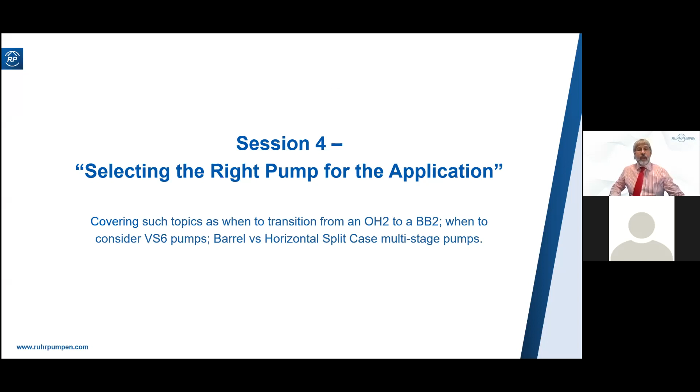Now let me get back onto the show. And here we go.

Okay, let's look at a couple of scenarios. Scenario A, you are a process engineer or mechanical rotating equipment engineer, and you have the preliminary process data for a pump duty. For example, here we go, 200 cubic meters an hour, 200 meters head, 5 meters NPSH, specific gravity of 0.7, temperature 150 C, and 50 cycle

site electricity. My apologies that I haven't changed this into American units for this Western Hemisphere presentation. You'll get used to using cubic meters per hour. Anyway, here's your duty. So the question you ask is, what sort of pump will this be?

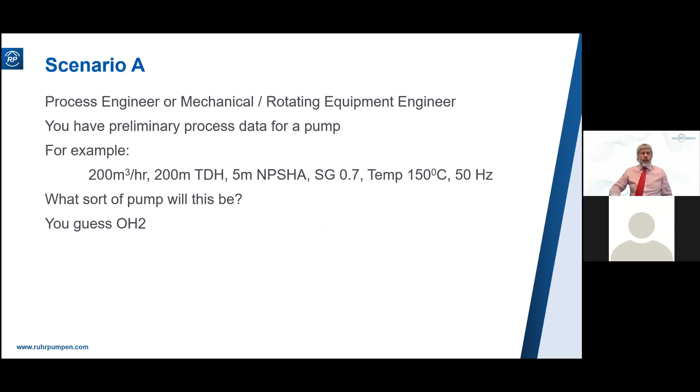Now, this is presumably an early FEED study stage, and you probably don't want to waste the pump vendor's time by asking. So you go with your gut and you say, it's probably an OH2. Are you right? Well, I'm going to give you the tools to be able to check this out and save you getting into trouble.

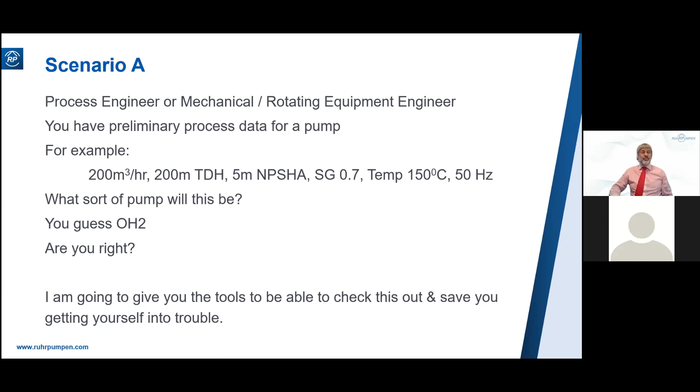That's scenario A. Scenario B, well, it's the same situation, but from the opposite viewpoint. This time you're a salesman or applications engineer, and your customer, the aforesaid process engineer in scenario A, has asked you, what sort of pump do I need for this duty? Just a quick check, don't spend long on it. So what do you do? You probably plug it into your pump selection program and see what it spits out.

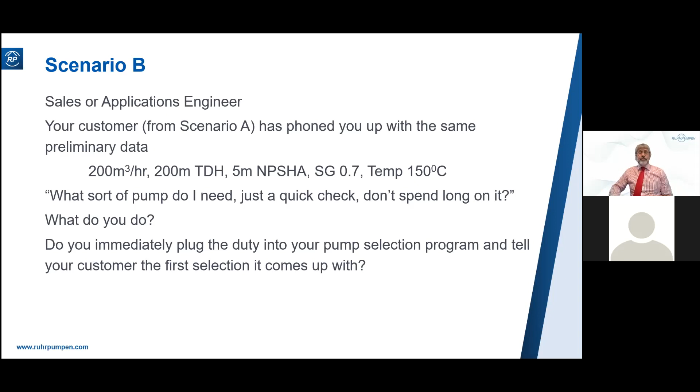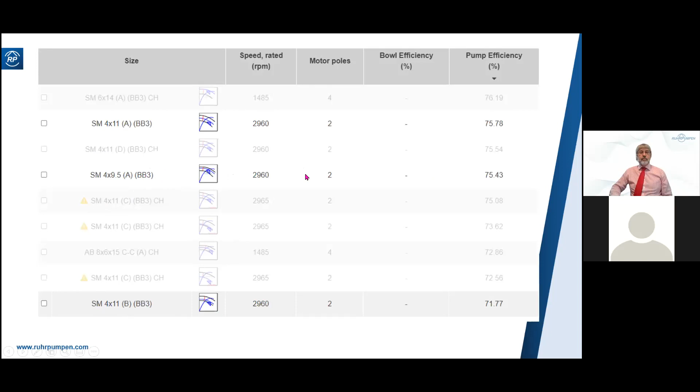Well, I did that. The program defaults to listing possible selections by efficiency, the most efficient ones first. So the first 3 compliant selections, 1, 2, 3, are BB3 pumps, actually split case multi-stage pumps. Next, we have a couple of BB2 pumps, well back on their curves, as you can see. Then we get a BB2 two-stage pump. And finally, in 7th and 8th position, we get to an OH2, which is what we were expecting it to be in the first instance.

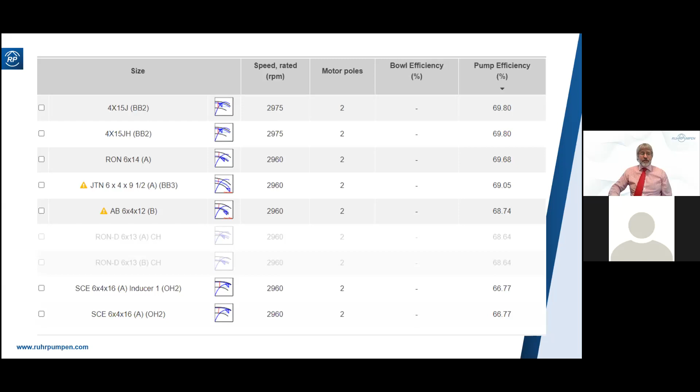Well, what did you do as the applications or sales engineer there? Did you tell your customer, it's a 3-stage BB3. It's a nice selection, bang on best efficiency point, and it's 76% efficient. Well, I hope you didn't, because it blatantly isn't a BB3 selection. So what do we learn from this? We learn that pump selection programs are stupid. They're a great tool, but a poor master. And finally, always know the pump you expect to see before you use the pump selection program.

And that's what I'm going to help you to do, to give you the tools to be able to check out before you go in and plug this into a selection program. You know what you're going to be looking for, what to expect. And here is what you do. You start with the least expensive option, the OH2. When you think about it, 200 cubic meters an hour and 200 meters, it feels like an OH2, doesn't it? And anyway, it's a good place to start on any search. So here we have the OH2, single stage, single suction. It's the refinery workhorse.

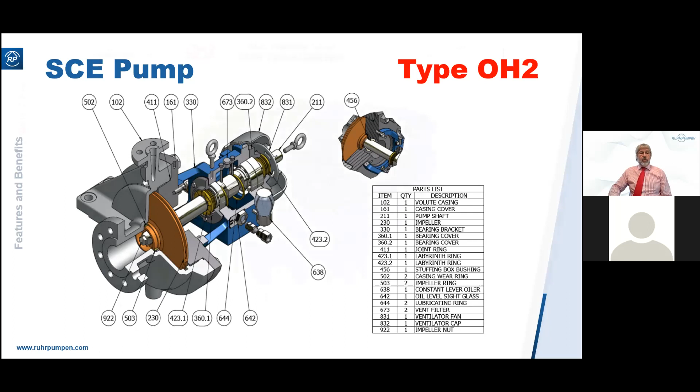It's not great on NPSH, and it's not great on high suction pressure duties. But here are 4 range curves. This one, 2-pole 50 Hertz, 4-pole 50 Hertz, and this will interest you more, you guys in the Western Hemisphere, 2-pole 60 Hertz, and 4-pole 60 Hertz. As I suggested, print them off, laminate them, and put them in your top drawer for ready access. We'll go back to the 2-pole 50 Hertz.

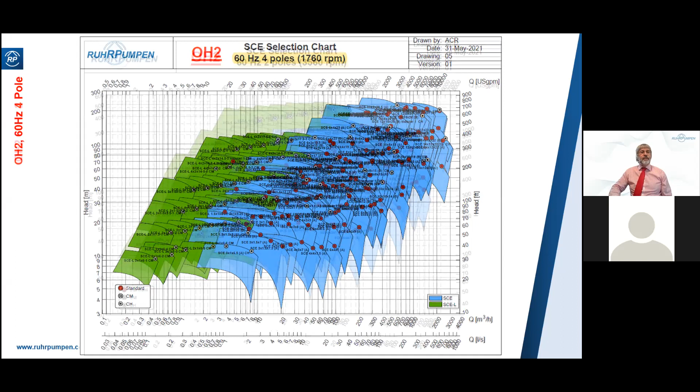And let's have a look and see if we have a selection for our specimen duty. 200 cubic meters an hour at 200 meters head. There, comfortably in the middle of the range. You can't read the pump size in this chart. Well, you can, if you zoom in enough, you can see approximately what size it is. But anyway, that's not the point of this exercise. Broad brushstrokes is the name of the game. We're looking at the big picture. What we can see is that there is very probably an OH2 that can do it.

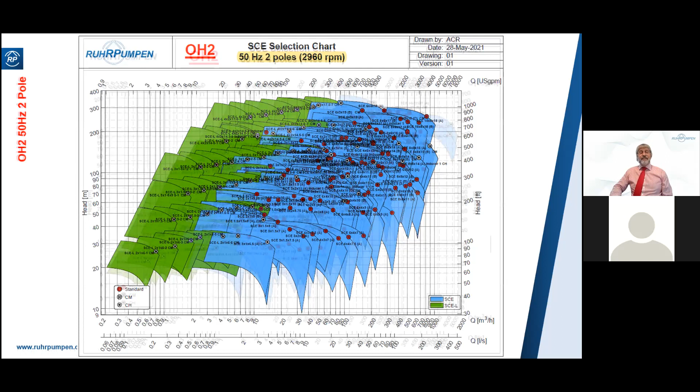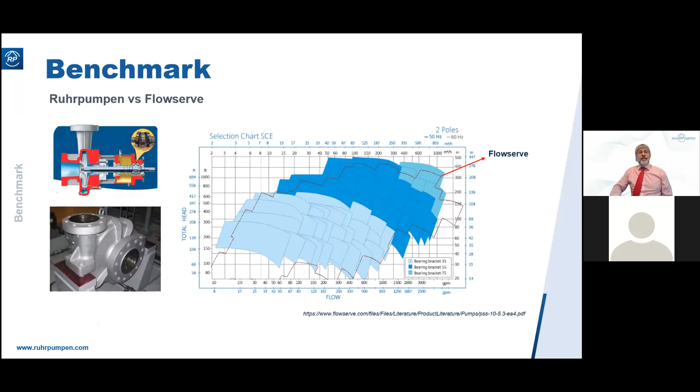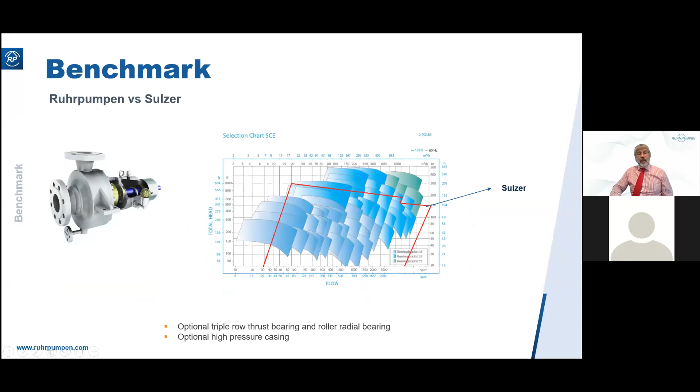Now, never mind that this is a Ruhrpumpen range chart. This is a fiercely competitive market, and you'll find that most other manufacturers have very similar ranges. So if Ruhrpumpen can do it, so can many of the others. But don't take my word for it. Here is the Flowserve published range chart superimposed on top of the Ruhrpumpen one. As you can see, very similar range. Looks as if Flowserve have an outlying pump that Ruhrpumpen doesn't have, but in the main area, pretty much the same area bound. Same thing for Sulzer. And again, for Goulds. I also have similar slides for Gabbioneta, Apollo, Ensival, Finder, various others. And you would see, if I flashed them up, that they're all pretty similar. These final 3 slides won't be in the final released presentation, by the way.

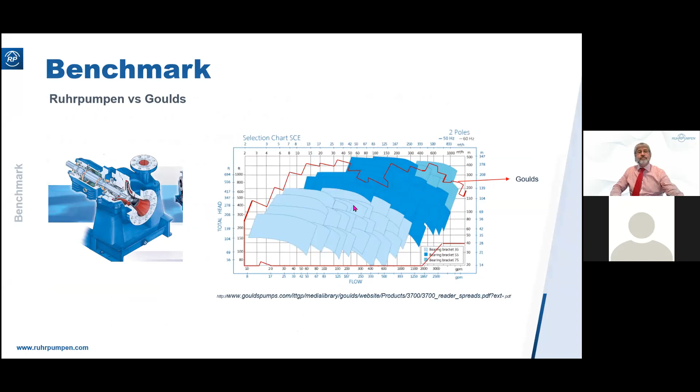So we've established that the flow and head falls onto an OH2. And having remembered that OH2 pumps aren't great on NPSH, we ask the question, do we have enough NPSH available? Well, I've made a simple NPSH suction specific speed calculator for you to be able to check this. All participants will get a working copy of this calculator when we send out this session's slides. It's just an Excel workbook. It's very simple.

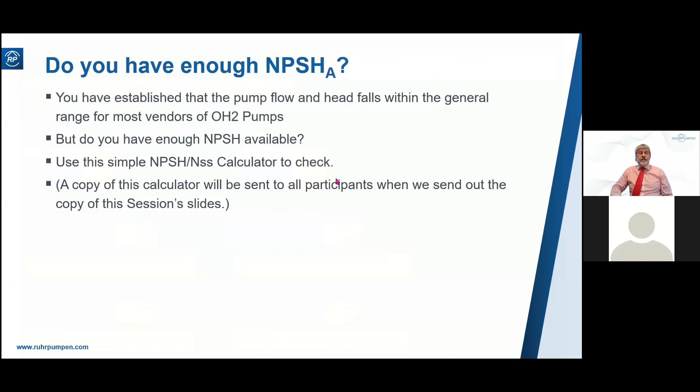What this calculator does is it calculates the suction specific speed of the theoretical pump that meets your NPSH available with the normally accepted 1 meter or 3 foot margin. So you enter the data in here in metric units, or here if you're looking in US gallons a minute units. So we entered 200 cubic meters an hour, 2960 RPM because it's 50 Hertz, and 5 meters NPSH available.

Now we see that the theoretical suction-specific speed of a pump to do this duty with a 1 meter or 3 foot margin would have a suction-specific speed of 12,759 in US units. Now, the industry has, for various reasons, most of them erroneous, set a maximum value of suction-specific speed of 11,000 in US units or 12,760 in metric units.

Now, this isn't a subject that I'm going to go into today, but I will do so in session 5 on NPSH and suction-specific speed in 2 weeks' time. But nearly all the pump vendors have given up trying to fight this limitation and have designed most of their hydraulics to be within this 11,000 limit.

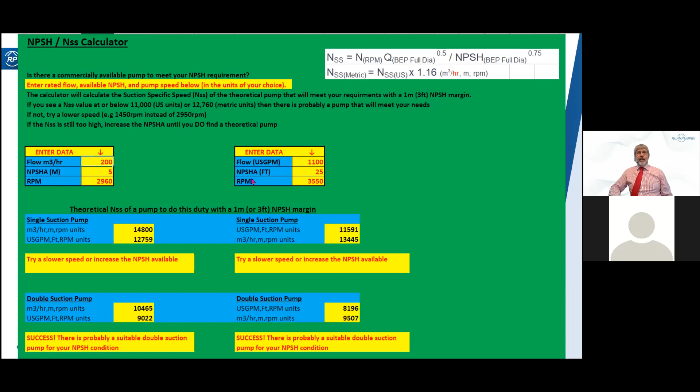Your options are, is there a 4-pole OH2 selection available? Remember, the program said, look for a slower pump, possibly. Well, we've selected a 2-pole and it missed on NPSH. So let's have a look and see if there's a 4-pole selection available. Here's the 4-pole curves, 200 cubic meters an hour, up to 200 meters. Clearly no.

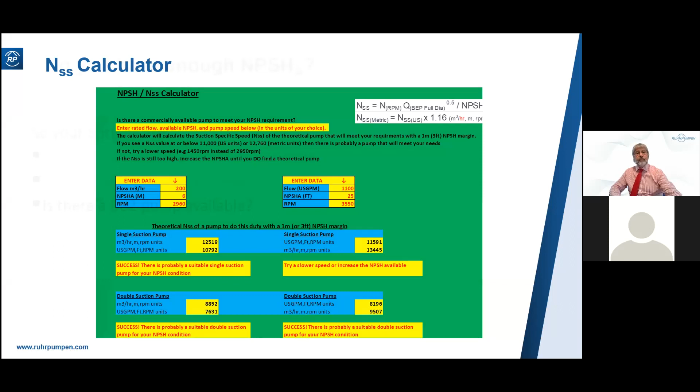So the next thing we say is, can you find a bit more NPSH-A? Back to the calculator, I've increased the NPSH-A now from 5 meters to 6 meters, assuming you can find an extra meter of NPSH. And this time, suction-specific speed 10,792 in US units, below 11,000. So you can be pretty sure that most vendors will be able to offer you an OH2 that will meet that duty. This depends on you being able to find that extra meter of NPSH.

If not, the next option we have to look at is there a BB2 pump available? Okay, here's the BB2, top suction, top discharge. It's a double suction pump, so has lower NPSH required. Why? Because the flow comes down here, splits into two, half goes into this side of the impeller, half goes into that side of the impeller. Double suction.

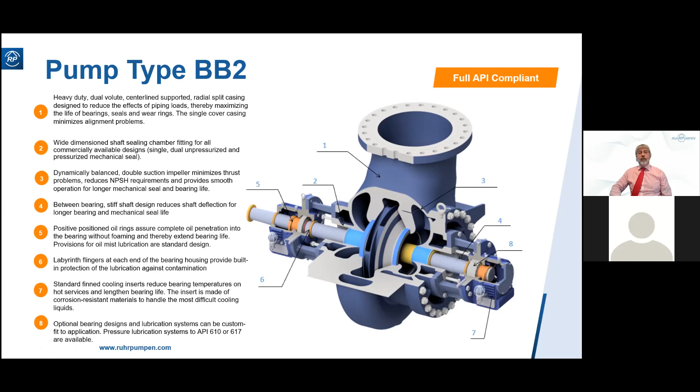So we've looked and said, is there a 4-pole OH2 selection available? No. Bit more NPSH available? No. BB2 pump available? No. So we're left with, is an inducer acceptable? Some customers will allow use of an inducer. That solves your problem. Is a higher suction specific speed impeller acceptable?

Now, although most of the pump vendors have adjusted our hydraulics so that we have 11,000 suction specific speed pumps, we still have the old impellers that have a higher 12,000, 13,000 suction specific speed. They're still available. So we could offer them if that's acceptable to you. Or we select a VS6 pump. That's the vertical barrel pump, the low NPSH R. What you don't do is select the 3-stage BB3 that I came up with in the very first beginning selection, because if you do that, you'll lose the project.

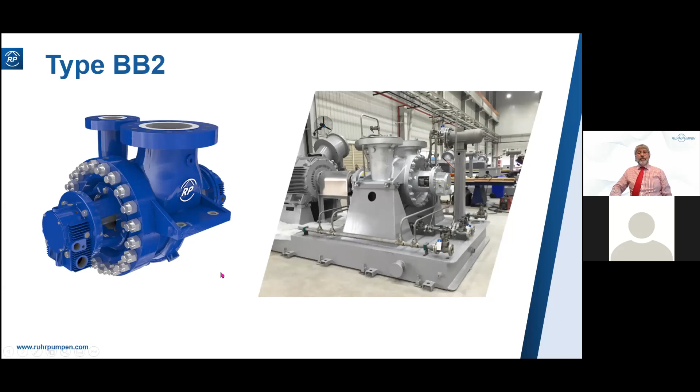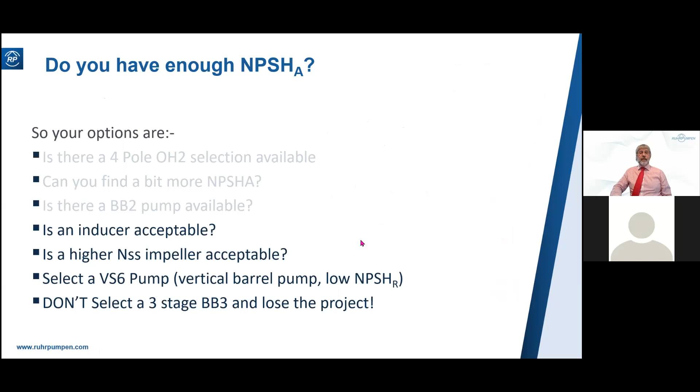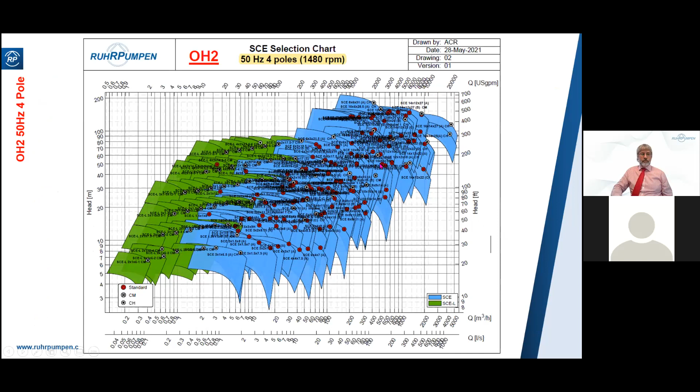Now, I just want to get this in perspective and go back to the OH2, one of the OH2 charts. The BB2 charts really fit in about here. Okay, so there's some overlap with the high end of the OH2, covers about there. Okay. Moving on.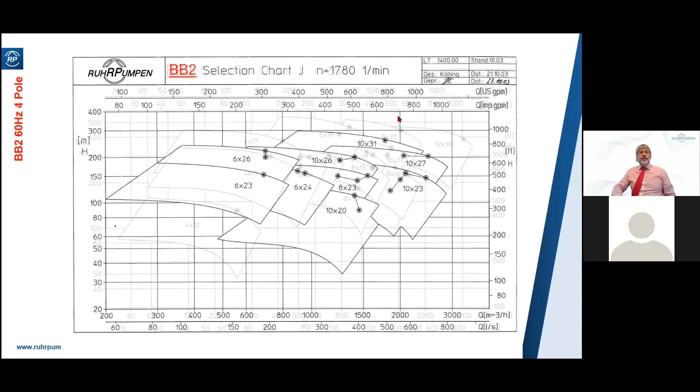We're still in the BB2 range, this time 2-stage pumps. Again, top suction, top discharge. There's a sectional drawing of it. And let me show you the flow passage. Here's the suction. So the flow comes in through the suction, down this passageway, into the first stage, gets thrown out into this crossover, into the suction of the second stage, spun round and comes out here, which is here. Okay.

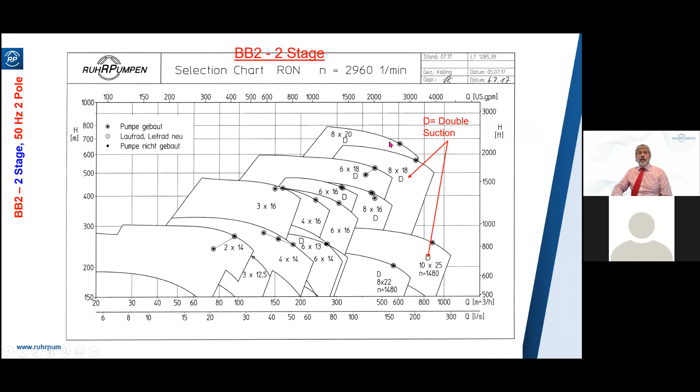Here's the range chart. This one, first at 50 hertz, gets you to about 800 cubic meters an hour at 600 meters. And at 60 hertz, and in gallons a minute this time, it'll take you to about 4,000 gallons a minute and 3,000 feet of head. Notice that double suction is available on some of the larger sizes to reduce NPSH.

So we had a look and you couldn't get a suitable selection to meet your NPSH required with any of the OH2s or the BB2s. The next logical place to go would be for a VS6. These are traditionally used when you have very low, even 0 NPSH available at grade. Works on the basis that if you have 0 NPSH available at grade, here 3 meters or 10 feet down, you have 3 meters of NPSH available, or 10 feet of NPSH available. So we make this pump long enough by putting in 1 meter or 3-foot spool pieces in here to lower the first stage impeller sufficiently that you end up with sufficient margin to have your pump work.

But this type of pump isn't just an NPSH saver, it's a space saver as well. It takes up about 20% of the floor area of a BB2. Well worth considering. It's also a cost saver. It's less expensive than a BB2, in particular because you only have one seal and one sealing system. So it's going to be less expensive than a BB2 with 2 seals and 2 seal systems. But unfortunately, civil engineers don't like digging holes. There can be good reasons for it, such as high water tables or groundwater quality. But if you can persuade them to dig a hole, you're saving costs all the way. Big uses for these pumps: light hydrocarbons, C2, C3, C4, condensate water in power stations, ammonia, liquid oxygen, liquid nitrogen.

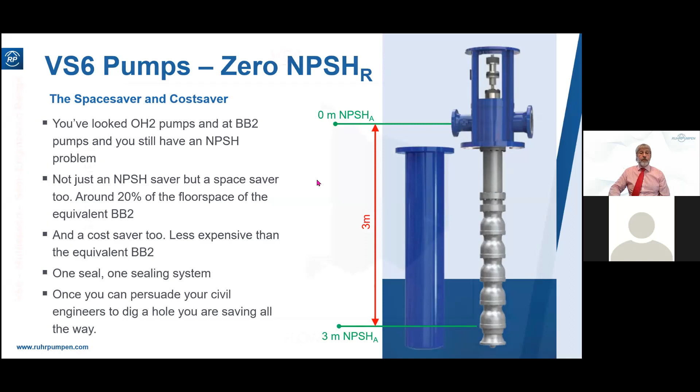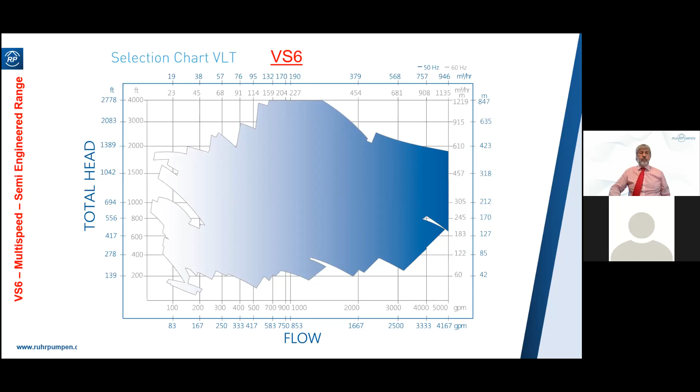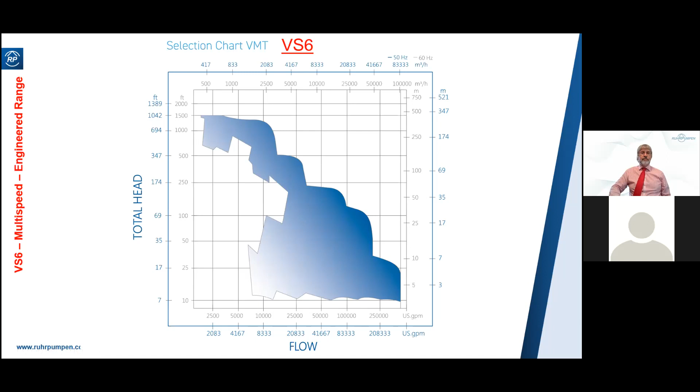Now we move on to axially split case pumps, type BB1 and BB3. They're most commonly seen as pipeline pumps for both oil and water pipelines. API 610 puts a limit on the use of axially split pumps. It says that you have to use radially split pumps if you're over 400 Fahrenheit, if your SG is less than 0.7, or if your discharge pressure is over 1450 PSI.

What they're largely concerned about is leakage through and past the flat gasket that seals the upper case to the lower case. Now, these limits are very conservative, and API does accept that some manufacturers have excellent installation lists of pumps exceeding these limitations. And I'll go into that a little more when we look at the BB3 in just a minute. It's a very interesting subject. There's a lot of debate on it. And if you're interested, then have a look at this reference by the pump guru, Simon Bradshaw.

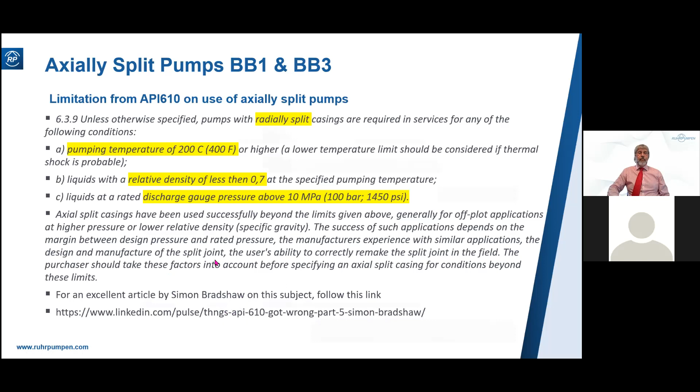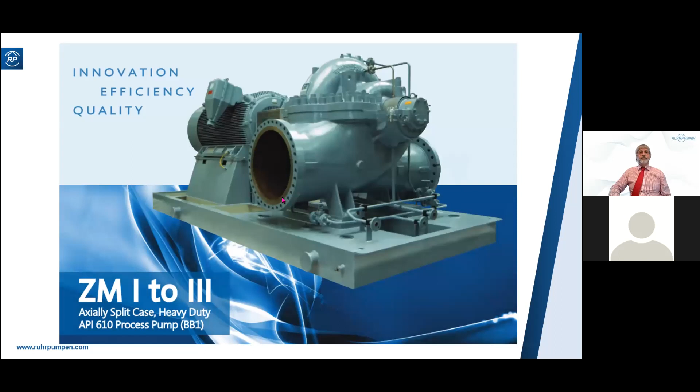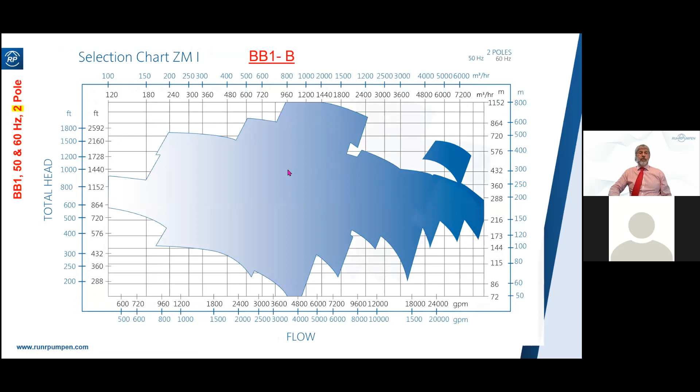So here's the axially split case single stage pump, our model ZM. And again, we have 4 slides. First one is 2-pole, and this time 50 and 60 hertz. So we can see that we are going in American units up above about 3,000 feet and flows up to 24,000 gallons a minute. Four-pole, 6-pole, and 8-pole. So as you can see, here we go. We're going to some very high flow pumps.

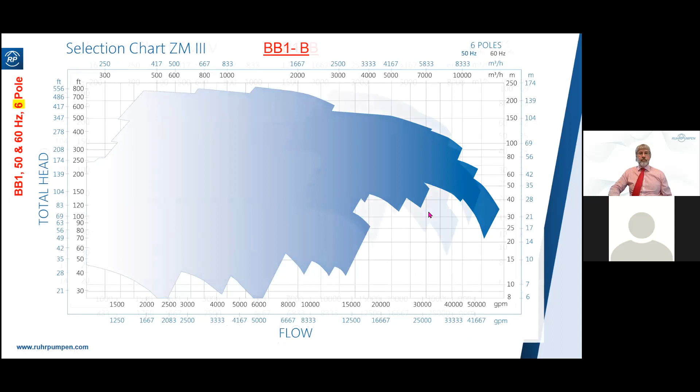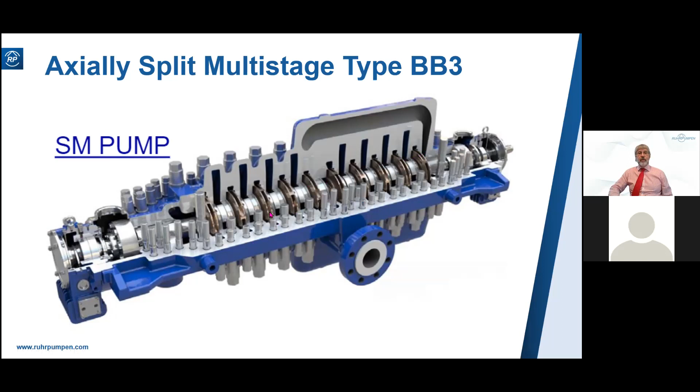Here is the joint that API 610 is concerned about. Now, note how in our design we have these interstage bolts, which ensure gasket compression in this area is good. And so it prevents washover between stages, particularly at the center stage. Here is an example of a pump that doesn't have interstage bolting, and you can see the effect of washover here at the center bushing.

Now, we're not unique in having this design. Flowserve has a similar design and have for many years. I recall when I was working for Flowserve, we frequently said to clients, look how many pumps in propane and butane service we have with this type of design. So it's a good way of progressing. You really don't need to go to a double case pump if you're handling propane at these sort of pressures.

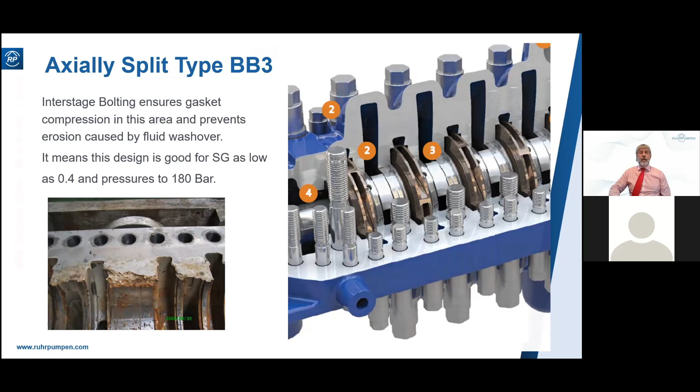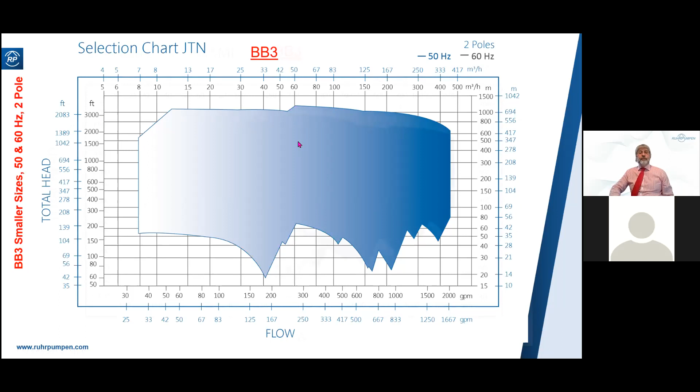Here's the range chart for the smaller, lower head sizes. So 300 cubic meters an hour, 700 meters head, or at 60 hertz, we're talking 2,000 gallons a minute and 3,000 feet. And the larger sizes, in US gallons a minute again, 6,000 gallons a minute and 6,000 feet.

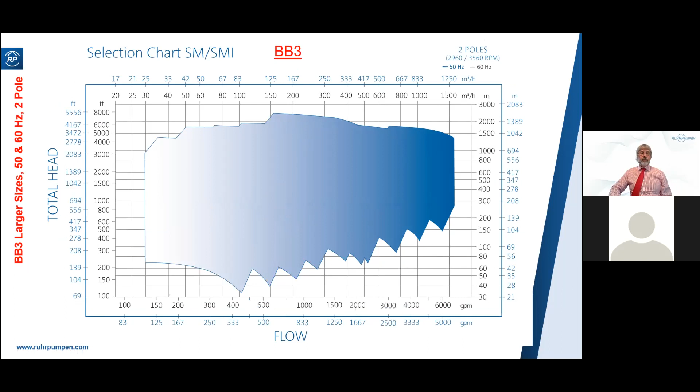Finally for today, double case pumps, type BB5. When do we use these? Well, you use them when you have no other choice. High pressure, low SG, customer won't let you use a BB3 for low SG product.

It comprises an inner case and an outer case. The outer case is the pressure boundary. The inner case can be a split case volute design, like a BB3, but more commonly, it's a diffuser design. The impellers can be inline, all facing the same direction, I mean, or back-to-back, as shown here.

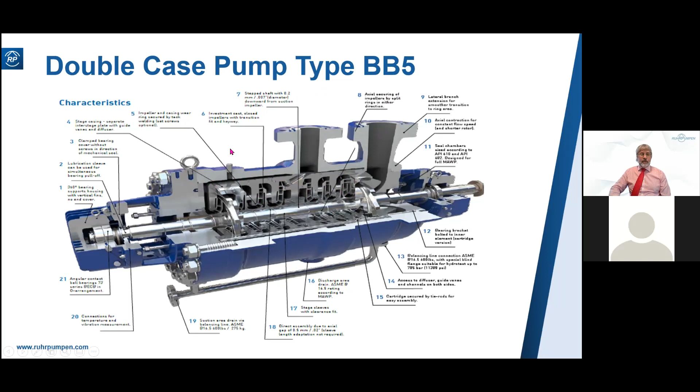So let me show you the flow path again. It comes in here through the suction, into the first stage, second stage, third stage. It enters this passage and crosses over into the fourth stage, fifth stage, sixth stage, and then out the discharge. It's usually built as a cartridge pull-out design. You pull out the inner case and take that off to the workshop to be dismantled.

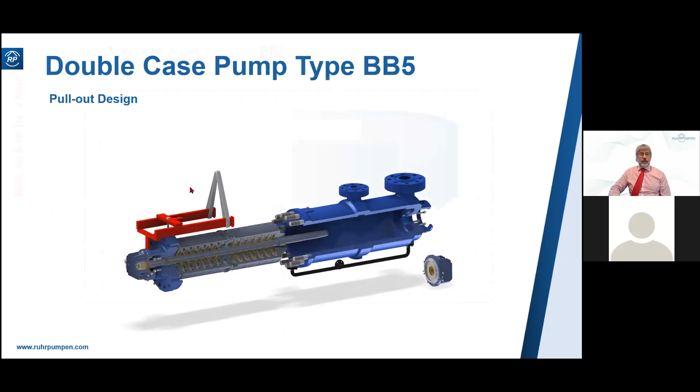I will probably be doing a session on BB5s in the coming months, among my planned courses still to do. Here is the range chart. So up to 6,000 gallons per minute and 13,000 feet of head at 60 hertz.

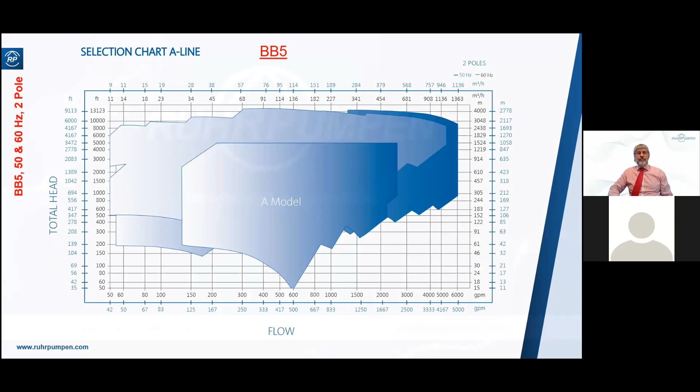Now this is where I'm leaving the session for today. We have covered the main range of pumps used in the oil and gas industries. I've not tried to cover chemicals, water, general industrial, or fire, because, as I said at the beginning, there's a limit to how much we can achieve in a 40-minute session.

Now, I apologize that there were an awful lot of detailed slides. Again, I don't expect you to take them all in. I'm not going to hold a pop quiz. I'd suggest that you print the curves off, laminate them, and put them in your top drawer for easy access next time you're speccing or selecting a pump.